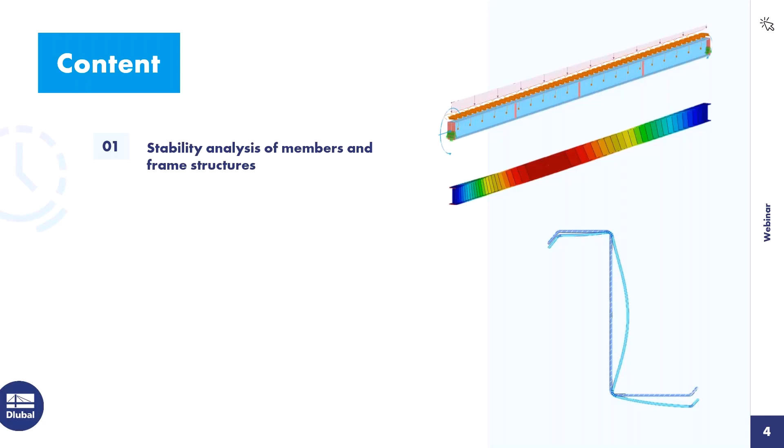And the table of contents looks like this. First I want to focus on the stability analysis of members and frame structures. Second, I want to go to the stability analysis on a cross-section level using the finite strip method. Then I want to show you how the buckling analysis is integrated in the steel joints add-on. Lastly, I want to show you how we can use the structural stability add-on for troubleshooting of instabilities, how we can leverage that for that purpose.

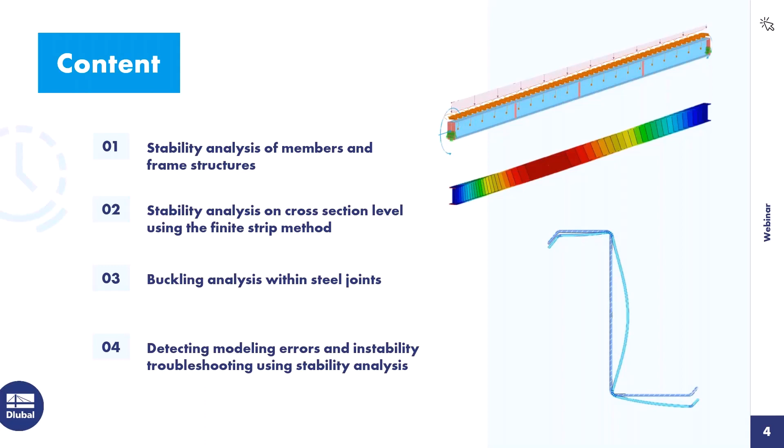Okay, before we jump into the first model, I want to give you a brief introduction and explain at the very least a few points related to stability analysis and how we perform it in RFEM 6. So what elements or structures are we taking care of with this analysis method? It's usually slender members and structures under compression that tend to become unstable, where the slenderness of a member or a structure is not only defined by its dimensions—the greater the length of a structure or member compared to the cross-sectional dimensions, of course, the more slender and prone to instabilities.

But it's also related to material properties. So if I have a material that has high strength and low stiffness, then it's more likely that stability failure will be the critical design element as opposed to cross-sectional failure. And then lastly, the boundary conditions, of course, play a major role. If I have rotational restraints or lateral restraints for our member, it's not that likely to become unstable.

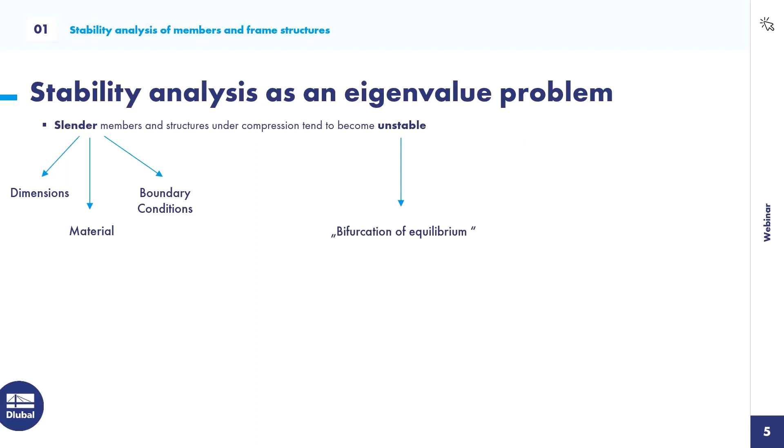And what do I mean with unstable? When we reach the unstable state, we have no clear state of equilibrium. We have instead a bifurcation of equilibrium, so there are multiple paths that the structure may follow. And that's why this linear stability analysis is often referred to as a linear bifurcation analysis, or LBA. I might use that abbreviation throughout this webinar as well. Also, the critical load may sometimes be named the bifurcation load.

Using the FEM, the ideal bifurcation load can be determined by solving a conventional eigenvalue problem. So we can set that up and solve that.

In that context, what does ideal mean? It means for the stability analysis that we treat the structure as linear. So we assume a fully linear structure behavior and a perfect geometry, meaning the base geometry of our model is used in this stability analysis.

The eigenvalue problem in the general formulation has two symmetric matrices, A and B, the eigenvalues lambda, and the respective eigenvectors x.

To solve for the unknown eigenvalues lambda, we have to set the first term of our formula to zero, and that's mostly done by calculating the determinant of this first part in the bracket and setting it to zero. We have multiple numerical tools or solvers to do that.

Determinant determination, yes. And in our specific case, in the stability analysis, our two symmetric matrices are represented by the linear stiffness matrix and the geometric stiffness matrix.

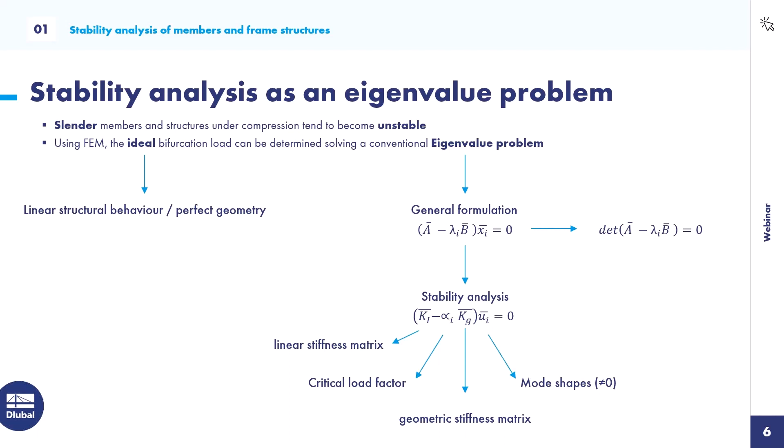We want to start with some fundamental solutions that are very well known amongst civil engineers. Euler already in the 18th century provided some simple analytic solutions for prismatic members under pure compression.

They are well known as the Euler cases. I have listed the 4 fundamental cases here with the analytical formulas to calculate the bifurcation load, or the critical load. In the first step, I want to go into our program now.

And try to simulate an Euler case 2 and make a small comparison, to see if we can evaluate the correct critical load according to Euler, and what else we can get from this structural stability analysis.

So let's jump into the program. As I said, I have prepared some smaller models for you. The first one is this simple Euler case. I have an HEB 300 beam with a length of 5 meters, and I applied a unit load of 1 kilonewton that sets the member under compression.

In order to perform a stability analysis with our add-on structural stability, I need to first activate it, and I can find it in the base data of the model. I activate the respective add-on here, which you can find under analysis add-ons, then click OK.

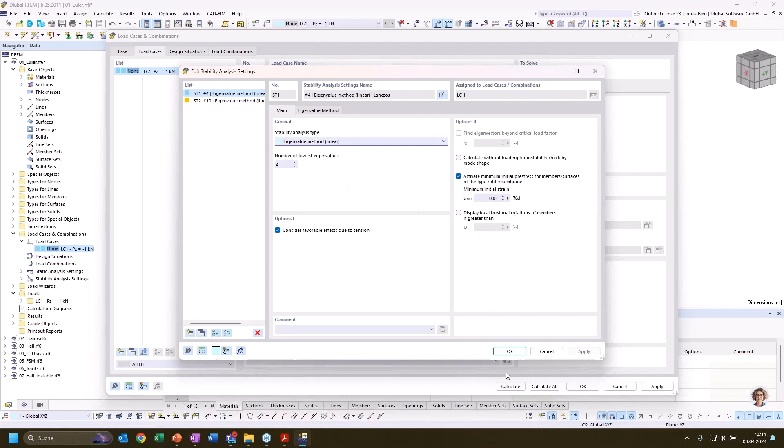multiple solver variants to solve the determinant of our eigenvalue problem. But the default solver should mostly suit us for this problem. There might be cases where you have subsystems that are not connected to each other. Then this default solver will throw an error and suggest another solver variant.

But with these default settings, I can just run the load case. Now the first thing the program is doing is solving the static analysis, and then he solves for the stability analysis. And when I have performed the stability analysis, I not only get the results for the static analysis, but I can also switch to the stability analysis results by this drop-down menu here.

Okay, so what do we see here? First of all, we get a drop-down menu here in the upper left corner, and also in the table we can see that we have these 4 mode shapes calculated with a respective critical load factor.

This represents the factor which I can multiply the external load with until my system would collapse due to instability. So if I would increase the unit load of 1 kilonewton up to 7,035 kilonewton and run a second order analysis, my system would become unstable and I would get an error message saying that. So I can read these critical load factors here.

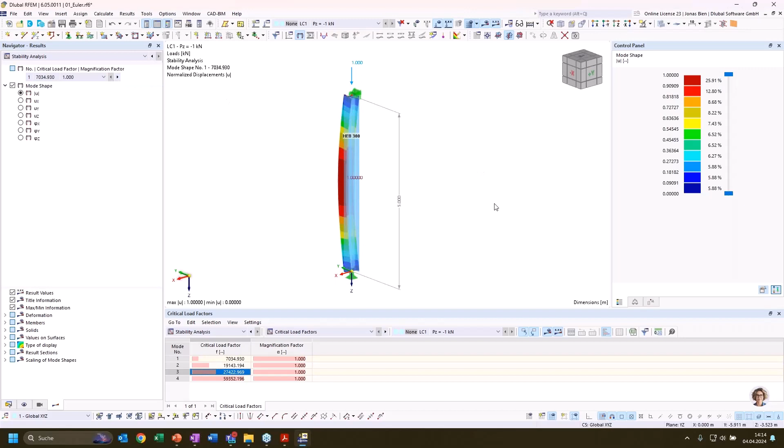Okay, so we can go through the 4 eigen modes here by clicking the table entries, or also go through the entries in the drop-down menu. We can see the first eigen mode presented to us would resemble buckling of our I-beam around its weak axis, and it's doing that in a symmetric way. We have a simply supported beam here, so that looks as expected.

Then the second mode shape would be buckling around the strong axis. And the third and fourth eigen modes are some multi-wave eigenmodes for buckling around the weak axis. These are mostly not very interesting for us, so usually only the mode shape with the lowest critical load factor is of interest for us.

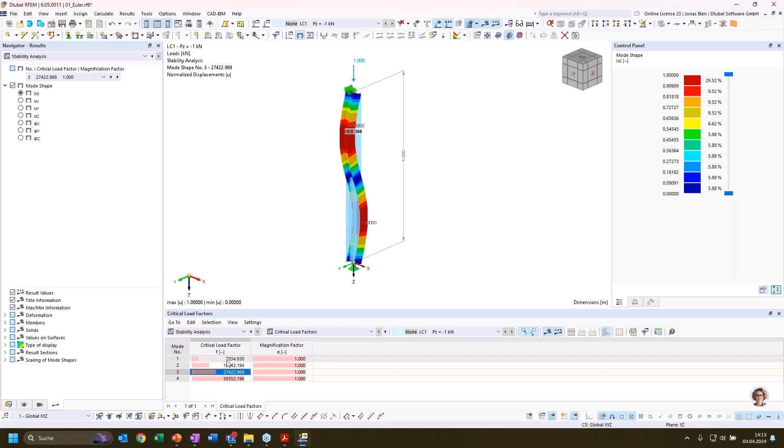And I want to now compare the critical load factor that we have calculated here with the critical ideal Euler load that we have for our Euler case 2.

Just so that you remember, we could calculate it using this formula: pi to the power of 2 times the Young's modulus times the moment of inertia of our section, divided by the effective buckling length. In this case, it would be the length of our member times 1, to the power of 2. I could do that using my calculator, but then I would need to look up all the values for my section, the member length, the material properties, and so on.

So I want to show you an alternative solution. We can also use the in-app console that we can open via the toolbar. In here, I can reference all the objects that I have in my model. For example, I could reference my material number 1 by typing this and then typing a dot, and then I see all the options or properties that I can ask this object for. For example, I would find the elastic modulus here, and if I press enter, I get as an output the elastic modulus of our material number 1 in SI units.

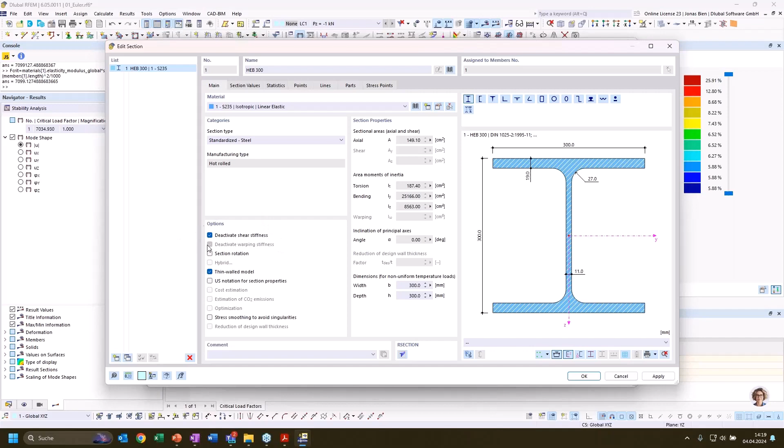So that's pretty close to our critical load factor that we calculated here according to our structural stability add-on. The difference now comes from an effect that we take into account with the finite element method in our calculation, which is the shear stiffness of the section that was neglected by Euler.

So if we want to compare values, we can manually deactivate the shear stiffness for our section in RFEM and do the calculation again, and see what our critical load factor would now be. If I again go to the results, we now see that our critical load factor is much closer to the ideal Euler load.

It compares very, very well.

We could also calculate the critical load for buckling around the strong axis. We just need to swap the Z with a Y value, and we have the moment of inertia about the strong axis. This value is quite satisfying when compared with the result we received from the structural stability add-on. So that compares quite well. We've, as we expected, met the results of the analytic formula.

Now that we're confident our solution provides reasonable values, I want to show you another important result of our stability analysis when it comes to member results. This is often used for the later design of the column. If, for example, we would take a classic approach to design this steel column using an equivalent member method, we would need the effective buckling length. We can use the structural stability add-on to calculate that effective buckling length.

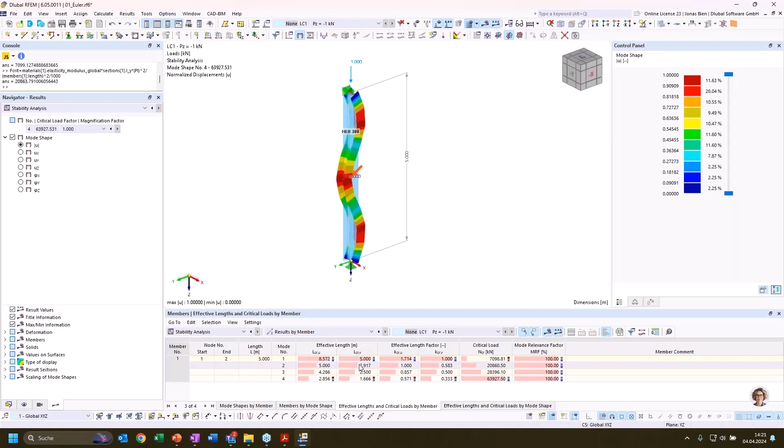So we just go to the Results by Member tab in the table, and go to Effective Length and Critical Loads by Member — the last tab also has these effective length values included. Now we see for each mode shape, we have effective length given for both main directions. U represents the strong axis, while V represents the weak axis. It's like Y comes before Z, and U comes before V — that's one way to keep it in mind.

For the first mode shape we have two effective lengths, one for each axis. I want to explain what's done in the background — it's nothing else than taking the critical load formula from Euler for case number 2 and recomposing it, evaluating it for L, with beta being the buckling length coefficient, and beta times the system length being L critical, the critical buckling length. When we know our F critical, the critical buckling load, we can evaluate the critical buckling length. And dividing by the system length, we can evaluate the buckling length coefficient beta. That's what's done here in the background.

The critical load of the member is just the normal force, the actual force in the member, times the critical load factor. From this F critical, our effective length is calculated, and then the effective length factor is calculated. We can do that as well using our console, plugging in this reassembled formula.

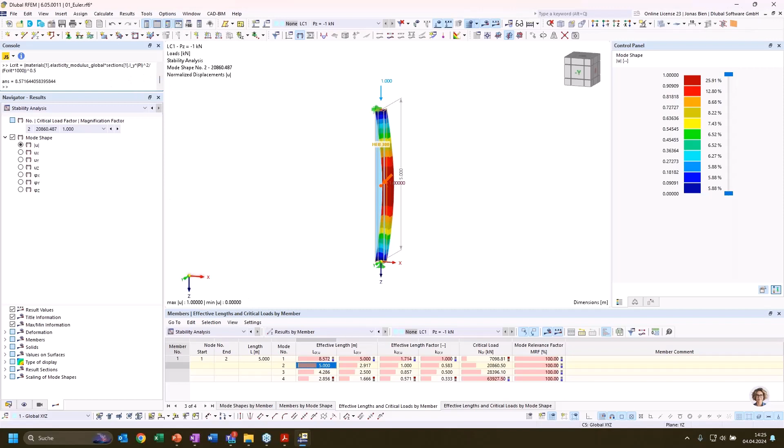I can demonstrate that by again evaluating the L-crit formula, but instead of taking the Z moment of inertia for the weak axis, I put in the moment of inertia for the strong axis, and I receive a value of 8.57 meters — but it wouldn't correspond to the relevant buckling length of our system for buckling around the strong axis. So this is very important to keep in mind when using these effective lengths for the stability design.

One thing I want to show: we can directly import these buckling lengths into our design add-on. So if I want to design this column with our steel design add-on using the equivalent member method, I have to assign these effective lengths.

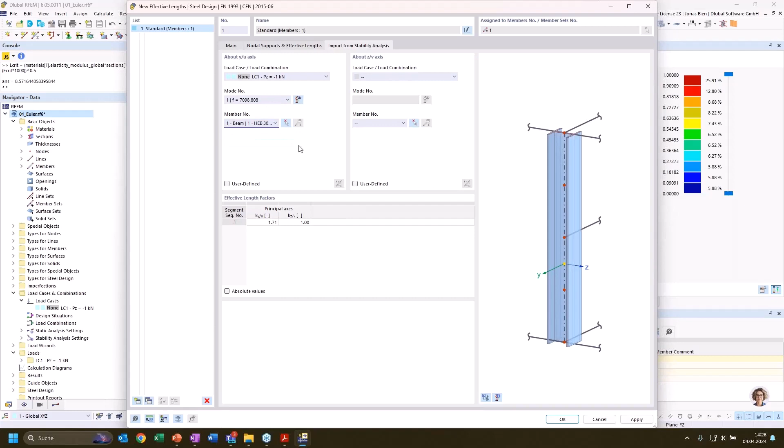Here I have the option to import the buckling length from the stability analysis. If I click this, I get another tab where I can enter the load case, the mode shape, and the member number. It will then take the buckling length coefficient from mode number 1 for beam number 1 and evaluate the effective buckling factor to use in the design.

In this case, we have to take care that buckling around the strong axis happens in mode number 2, so we would need to enter mode shape number 2 here, while mode shape number 1 would be for the buckling length coefficient around the weak axis. So that would fit and suit our expectations.

Of course, we can do that for more complex systems as well. We need to keep in mind that when we have a more complex system and change something, the order of the mode shapes can also change. They are always sorted by the lowest eigenvalue or lowest critical load factor, so mode number 1 always has the lowest critical load factor. If we change something in the system, this sorting can change, but these entries need to be checked again manually because they don't automatically adapt to the changed model.

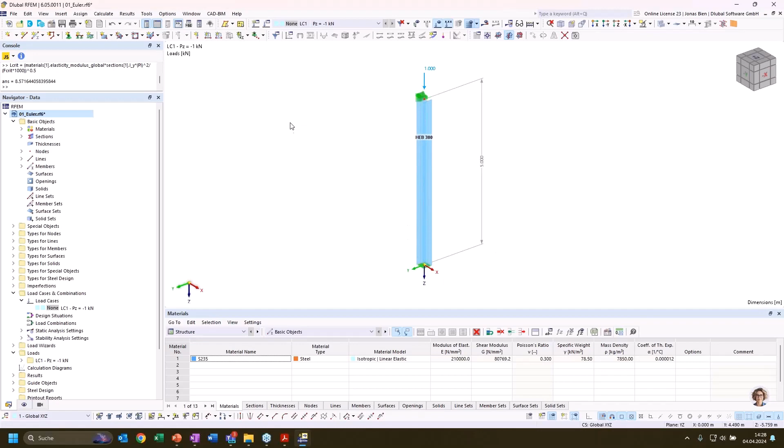I want to show you instead how the buckling length coefficients change or adapt when I adjust the statical system. For example, if I take a rigid boundary condition at the bottom of this column, it should calculate a lower buckling length coefficient because now the system resembles Euler case number 3. We'd expect a buckling length coefficient of 0.7, and that's exactly what we get for the first mode shape for the weak axis and the second mode shape for the strong axis.

We also need to consider, for these known cases, why should I use my add-on here? Because these cases are known, I can just apply the Euler formula and calculate my buckling length directly.

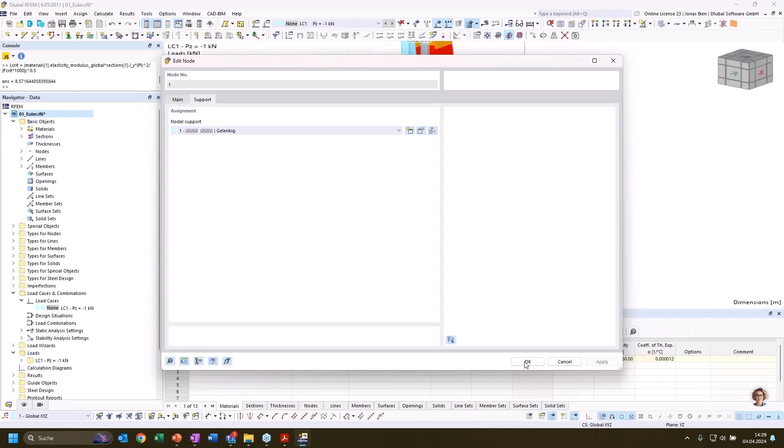But what if we have a certain spring stiffness here, somewhere between Euler case number 2 and Euler case number 3? Here it's not so obvious what the buckling length for our equivalent member check would be. Of course, we could look into textbooks that cover these cases, but we can also use the structural stability analysis to evaluate the effective buckling length factor, and as expected, it comes out between 1 and 0.7.

So everything's set. Because it's a linear analysis, it's interesting to see what the program does with nonlinearities, so for example, if I apply some kind of nonlinear boundary condition here.

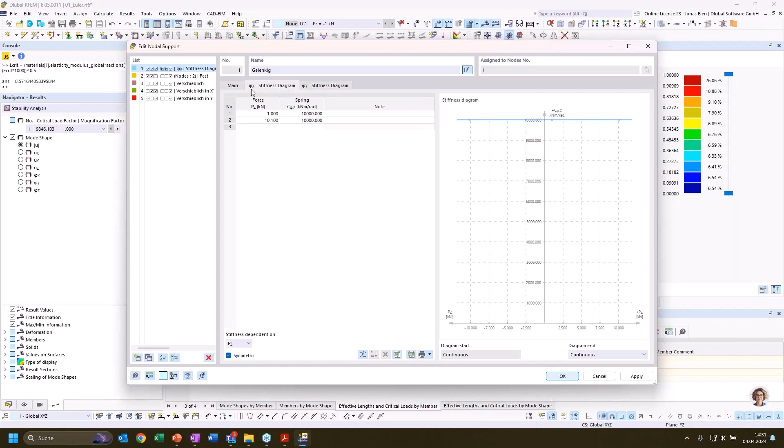At first glance it doesn't look that nonlinear, because in this case I want to apply a stiffness diagram where the stiffness of our spring at the column bottom relates to the vertical load. As you can see, it should be constant, no matter what the vertical load in the column is, the spring constant should always stay constant. So it doesn't look nonlinear at first glance, but we have to take into consideration that all these nonlinearities are ignored in the structural stability analysis.

I want to demonstrate this. So although we have set this nonlinear spring stiffness at the bottom, as a result we get Euler case 2, where a pure hinge is assumed at the bottom. So only these entries are taken into consideration for the structural stability analysis when it comes to supports.

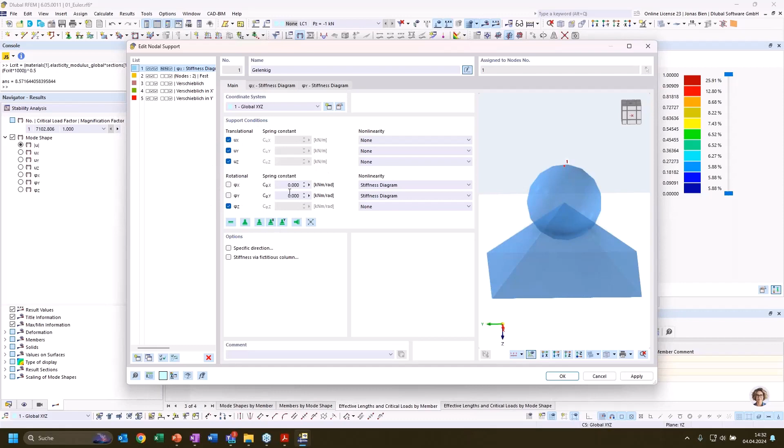Of course, when working with other nonlinear elements such as tension rods or buckling members, these are taken into consideration or not according to their state in the static analysis. So if we have a tension member that is under tension, it will be taken into consideration in the structural stability analysis as well, and vice versa.

Okay, one last thing to finish this simple example: let's delete this nonlinearity and see what happens if we divide this member in half.

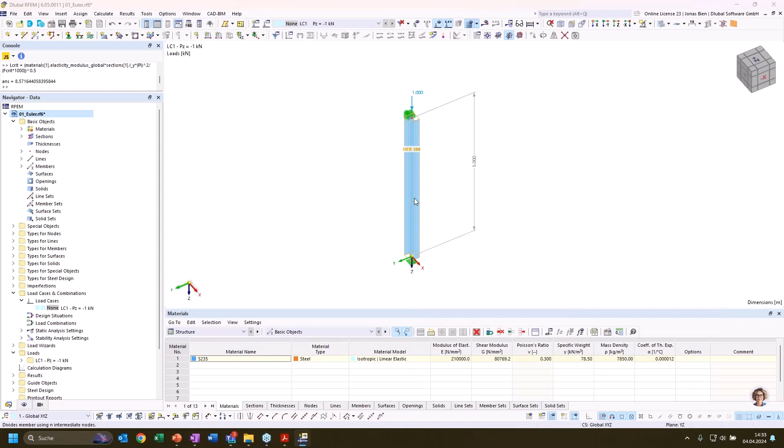I just introduce an intermediate node and divide this one column into two separate members, and again run the structural stability analysis. What does it do with the buckling length? Is it still valid, or does it give me some weird results? Let's see. The critical load factor is still the same as if we wouldn't have divided this column.

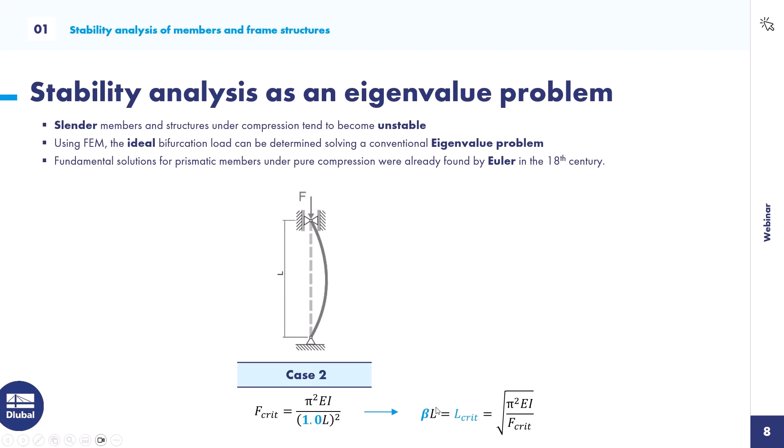So we could still use this effective length factor for the stability design within steel design, or some design add-on. It would still be valid.

Okay, now let's increase the complexity a bit. What if we have more than one member in our model? In this case, we have a 2D model of a two-hinged frame with an additional column, number 5, that is just connected to this two-hinged frame by a truss member. This is basically a simply supported column, as we have seen before, which leans toward this two-hinged frame, or is supported by the two-hinged frame at the column head. All three columns, member number 1, 3, and 5, are loaded with a load of 1000 kilonewton in compression.

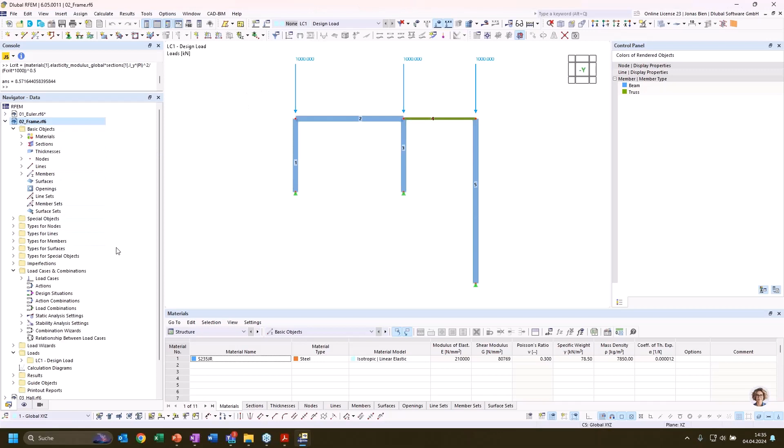Now let's perform a stability analysis for this load case as well. It should be all set for this analysis, same settings as we used before for the Euler case. And accordingly, we also get 4 mode shapes for our structure. I want to quickly browse through these mode shapes together with you.

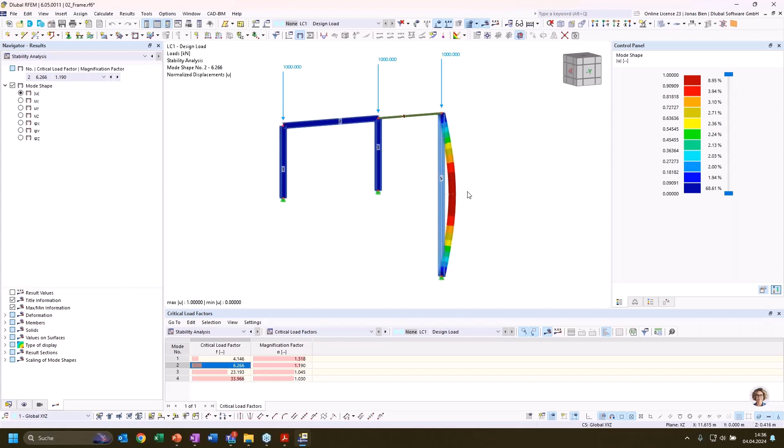So the first one is some asymmetric lateral deformation of the two-hinged frame, and also this connected pinned column is moving with the two-hinged frame. Then the second mode shape would represent buckling of the longer column with pin supports around the strong axis. The rest of the structure does not seem to have any deformation. The third would also be a higher mode of this pinned member number 5. And mode shape number 4 would resemble a symmetric buckling mode of the two-hinged frame without any participation of the simply supported column here at the side.

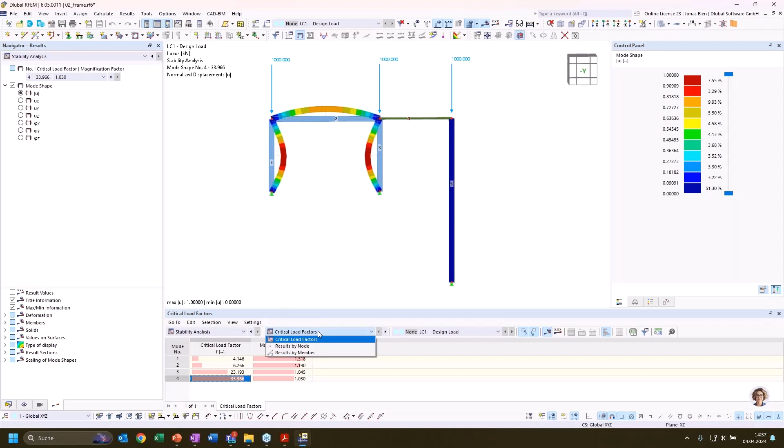So if we want to now extract the effective length, for example, for the columns of the two-hinged frame, we can go to the member results of the stability analysis and check the effective length by member. I can then click on one of those members and I will automatically be routed to the respective table entries. Now in the first mode shape, as we have seen, this two-hinged frame suffers from buckling around the strong axis, and we could read the effective length factor accordingly for the strong axis in this column. So we would get an effective buckling factor of 2.8, which is also in the realm of the expected results for such two-hinged frames.

If we now neglect this simply supported column at the side, we would expect an effective buckling factor higher than 2, and the exact value would be influenced by the stiffness of the girder and the columns, and of course the length and so on. Now with the additional column, it's also influenced by that. So that would be quite clear. We could take this effective length factor for designing this column for buckling around the strong axis.

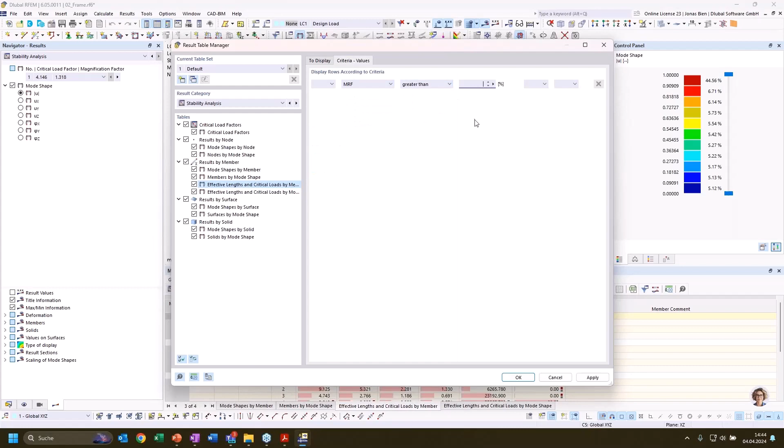For example, for the determination of effective length factors, here I would go the other way around. When I'm interested in the relevant buckling factor for column number 1, I would go through the modes I have calculated and only consider the mode shapes that have a significant mode relevance factor, and read my buckling length factor from the mode that has the lowest critical load factor. In that case, I would definitely take the value of 2.8 for column number 1 and also for column number 3.

All right, but I want to show you in the next step how we could also leverage this tool in a more realistic setting, or how to approach the buckling length determination in a more realistic model. So here we have an industrial hall. We have a lot of different load cases here that would give us probably about 100 or 200 load combinations. Of course, in some applications, we can have a lot more load combinations. Then the question is which load combination, or the first question for our buckling length determination, is which load combination is most severe for buckling for a specific member.

And I have now, for this case, deliberately started with result combinations, because sometimes, for example when I want to design bridges or so, I may have 10,000 load combinations, and it's not possible to calculate all 10,000 and assess them for stability. So what I would recommend, if you have too many result combinations to handle in one model—of course here it would still be feasible and no problem—but if you have additional load cases, that can be a problem.

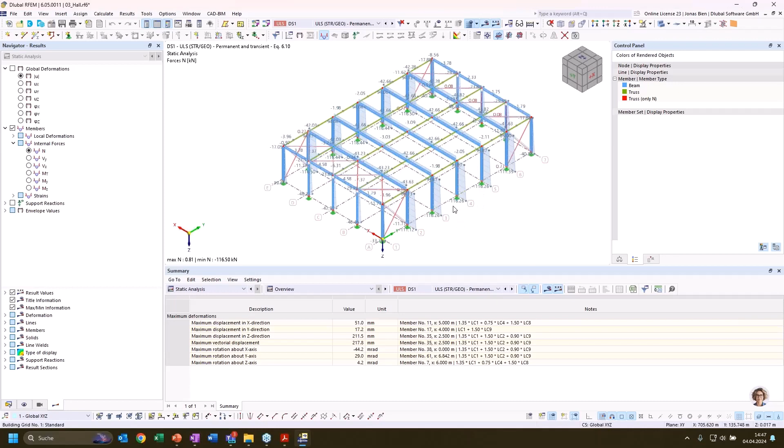I can find those if I go to the static analysis results for this design situation, go to results by members, internal forces, and stick to this middle column here. I click the column and get, in this result combination, all extreme internal forces for this member. So for example, the combination with the lowest or highest axial load, including the sign. The same is printed for the highest shear force in Y direction, highest shear force in Z direction, lowest shear force, and so on.

But we are interested in buckling, so I'm interested in the combination that gives the highest compressive load, which would be this one here with minus 116 kilonewton. In the last column, I would have the loading or load combination that leads to this axial load. Now from the result combination, just by right-clicking this combination, I can generate a load combination from this table.

Now for this load combination, where I have the feeling this could be the most relevant for buckling of our columns, I can perform an eigenvalue analysis, a linear stability analysis, by just activating it here and calculating it. So now I very specifically run the stability analysis for just this one load combination that I have generated from the envelope.

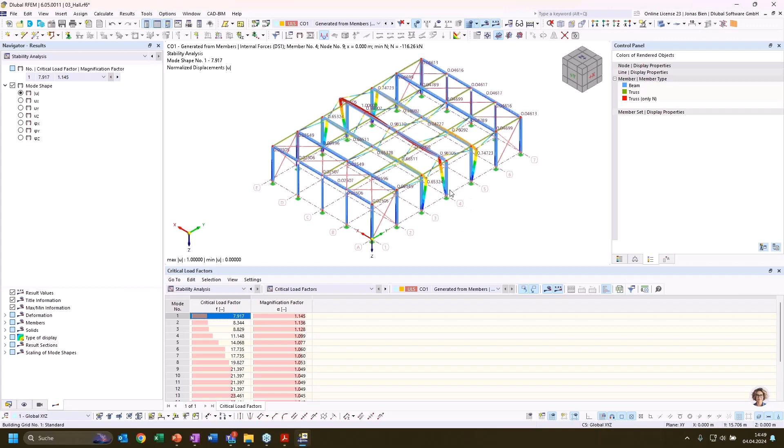Now the second question, after sorting out which design situation could be relevant, I have to figure out, for this column, which mode shape is most relevant for determining my buckling length. So again, as before, I have 20 critical load factors and mode shapes, and I can browse through them. Some involve deformation or buckling of the frame where this column is involved. Some are only isolated buckling of those columns, or some compressive member in the roof, so these wouldn't really interest me.

In order to filter these out, I can again use the mode relevance factor. I go to the table effective length and critical length by members, click on my member number 4, and get the whole table. I get the mode relevance factor for all 20 mode shapes calculated, and I see that only in 2 of these mode shapes is my column member really participating. So these would be the only 2 mode shapes suitable for extracting the buckling length.

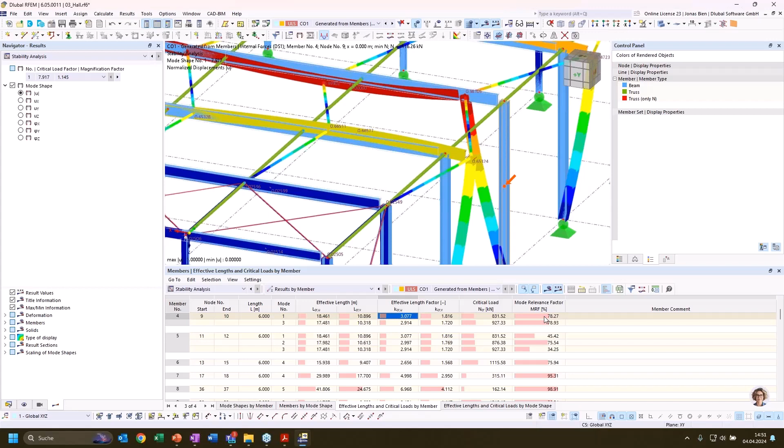I could of course apply the filter to make it more accessible. Then I would again follow the rule from the last smaller example: take the mode that has the lowest critical load with a significant mode relevance factor, and take the effective length factor for, in this case, buckling around the strong axis from this mode shape. So this is how the mode relevance factor can help you assess the relevant mode shapes for a particular member design.

That's what I wanted to show you on this model. Now I want to take the next step and highlight something you may have noticed so far. We have only discussed flexural buckling of members, but especially in steel structures, other stability modes can also govern the stability design of these members, namely torsional buckling or lateral torsional buckling. We can also investigate those stability modes with our structural stability add-on, but we need to activate warping torsion to detect those stability modes.

I want to make another small example where we investigate the lateral torsional buckling of a simple system, where again, as in the first Euler case, we know the exact solution, and I want to first compare the values we get from RFEM with the analytical value. So in order to perform a structural stability analysis that also considers lateral torsional buckling, we would, in addition to the structural stability add-on, also require the torsional warping add-on.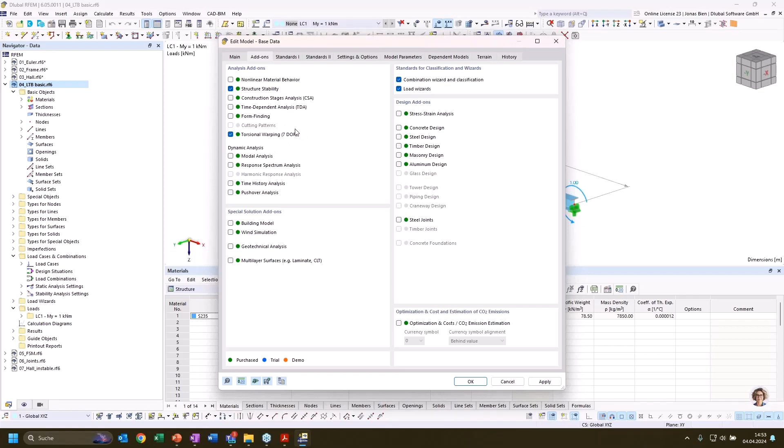And as soon as we activate the 7th degree of freedom, this would be directly included in the stability analysis, or would be taken into account.

I have now for this simply supported member, it's an HEB 300 again, with a length of 10 meters and a constant bending moment. I could run the stability analysis, and now we are not only getting modes for flexural buckling, or we wouldn't get any flexural buckling modes for this member at all because we have no compression in it, but I didn't activate the structural stability analysis for this particular load case, so I will just do that.

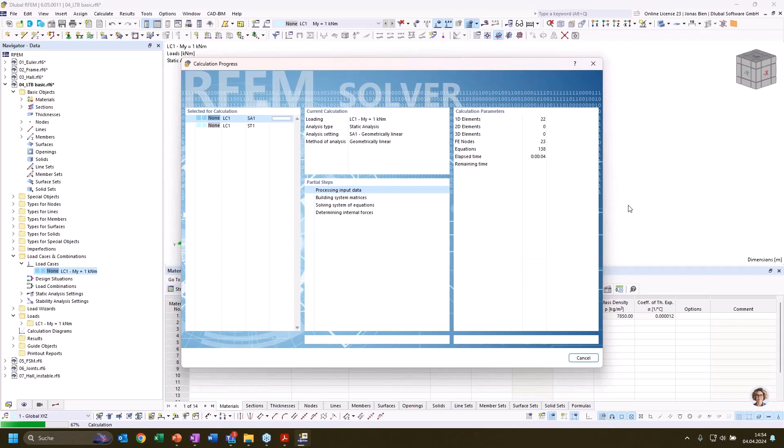And now we should get a lateral torsional buckling mode. When we switch to the results of the stability analysis, we can now see very clearly this characteristic deformation of our member. It tilts and at the same time moves in the direction of the weak axis. And again, we get a critical load factor.

And this one we can compare with the analytical solution. For this simple system, an analytical solution can be easily found in the textbooks. It was once also implemented or written down in some of the codes. For example, in the old German steel construction norm or code DIN 18800. I think in some national annexes of Eurocode 3, it's also given this formula.

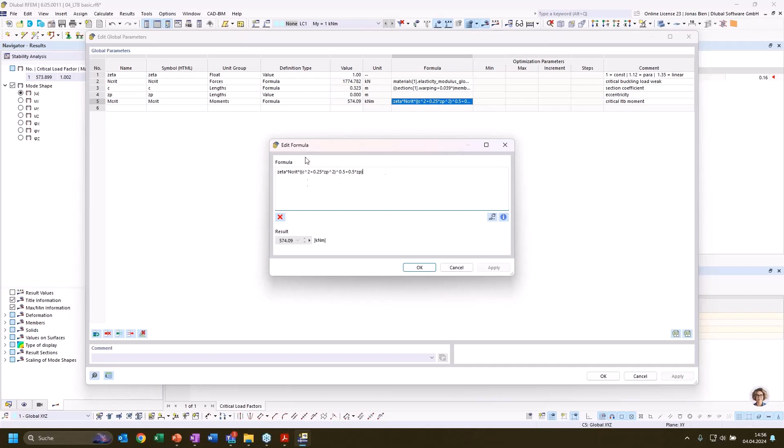But for our convenience, I already plugged this formula to calculate the critical bending moment for lateral torsional buckling into our global parameters. So that's another thing I can do instead of just using the console and typing in my commands to evaluate certain parameters or values. I can also use global formulas to global parameters to calculate something. For example, I have now created a formula for the evaluation of mcrit, and we can look at what goes into it. Maybe this looks somehow familiar to you.

So here we have a value or a parameter that describes the moment distribution, which is zeta. It's 1 in this case for this simple case with uniform bending. Then we have the elastic buckling load, Ncrit, that's the one that we already assessed in the first example. Then we have some parameter C that takes into account the warping and torsional stiffness of our section. And we have the ZP, which resembles the eccentricity of the loading, which is in this case not important. And what we get from this formula is a critical bending moment of 574 kilonewton meter.

We could also use the console again to evaluate this. So all the global parameters that we have stored, we can call them here in our console. And in this case, it's again written in SI units, so I would need to divide it by 1000 to get to kilonewton meter. And this is very close to the value that we evaluated here with the structural stability add-on. So it works again quite well.

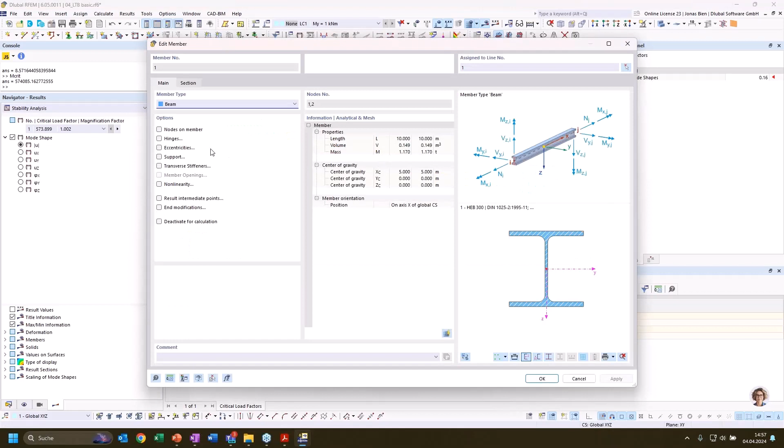But of course, as in the Euler case, we can use our structural stability add-on to investigate much more complex cases. For example, we could add member support. So I go to the member and add a support, and then I get this tab here where I can enter a member support. I could manually put in some rotational restraint. I could even apply an eccentricity of this member restraint. For example, I could say I have a rotational restraint at the top of the flange.

And we can now also in the global analysis take into consideration shear panels and rotational restraints. So these are also entered as fictitious stiffness. And you may know them from steel design or aluminium design or timber design, where you had always access to those restraints, but they were only considered in the design of the member, so in the design add-on. But we can now use them in the global structural stability analysis as well.

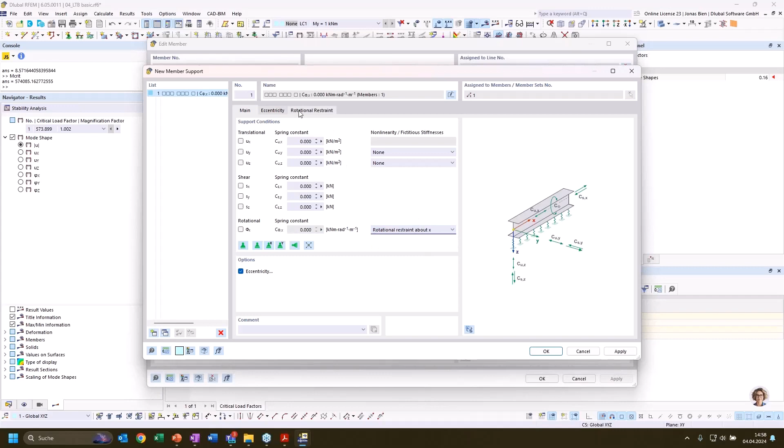So I could, for example, define a rotational restraint. For example, I want to consider some kind of sheeting that I have on top of my girder. I will now just take some random settings, more or less. I take some sheeting just to get some stiffness. Of course, these values, they were accessible all the time, but now we can, as I said, also leverage or use the stiffness that we define here in this global structural analysis.

And one thing that is also new, and I want to highlight to you, is that for the spring stiffness of the connection between the trapezoidal sheeting and our member, and also for the load introduced to the sheeting, we can now set load dependent values.

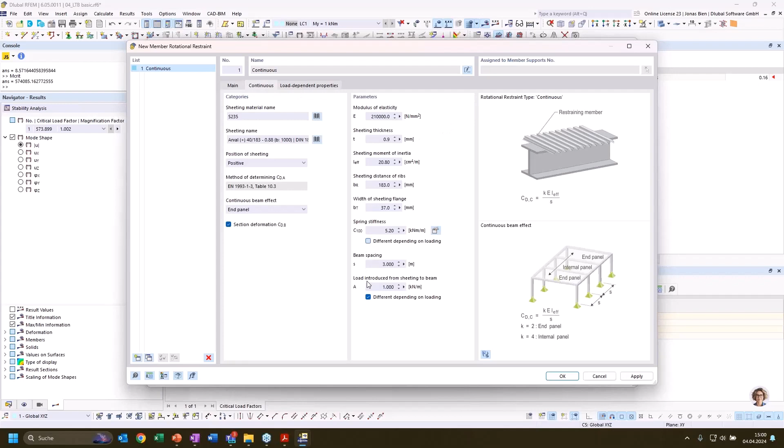If we click these options, we could set different values for different load combinations, for example to distinguish between situations where we have suction on the roof and compression or pressure on the trapezoidal sheeting. We could take this into account by adding different values here in the table. This is also quite new since a few months.

With this rotational restraint, I could also add a shear panel. And by the way, we are now able to not only add a shear panel in Y direction, but also in Z direction, which could be interesting for columns that are also girders rotated by 90 degrees for some reason. So we can also use that now, since some weeks.

We have now calculated directly some stiffness for the rotational restraint from our trapezoidal sheeting, and we could consider this in the stability analysis. By default, these fictitious stiffnesses, so the trapezoidal sheeting in this case, would only be accounted for in the design add-on.

If we activate the steel design add-on, in this case because we have a steel girder, and I now activate the lateral torsional buckling check according to the equivalent member method, we already see here that the default way of calculating the critical moment value is using the eigenvalue method, the same method we also use in the structural stability add-on.

Of course we need to set some boundary conditions for the design add-on. But in our case it's quite simple - we have simple support with fork supports, and that's what the default settings are also for the effective length settings. So that should be all right.

In order to perform the steel design, we also need a design situation and some load combination inside this design situation. I will just add a load combination with 1 times the first load case. And if we now do the calculation, we are running a static analysis, then the structural stability analysis of this member, and then the steel design analysis.

Let's check the results and compare them. First, in the stability analysis, it seems like nothing has changed - we still have a critical bending moment of 574 kilonewton meter. But in the design add-on, let's check the result here.

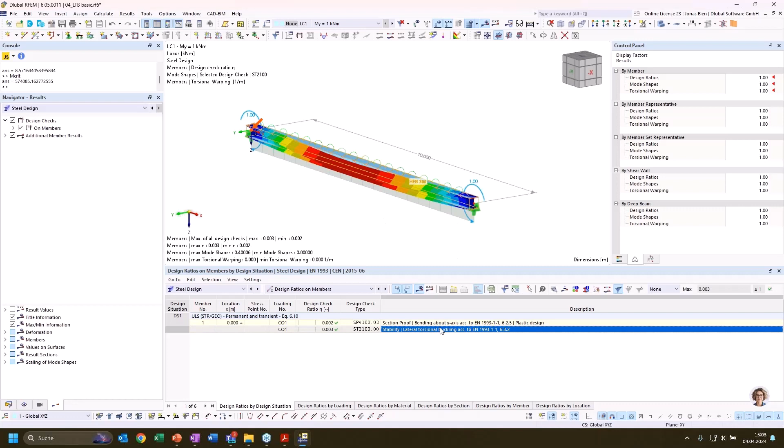We have now the check for lateral torsional buckling here. We can also see what the relevant mode shape would look like if we click on design details. And if we double click on the design details, we can also check what mcrit value is evaluated in the internal eigenvalue analysis.

We see that now in the steel design add-on, the rotational restraint on top seems to be already taken into consideration, because we have a much higher critical moment in our steel design add-on, while in the structural stability analysis the values stayed more or less the same.

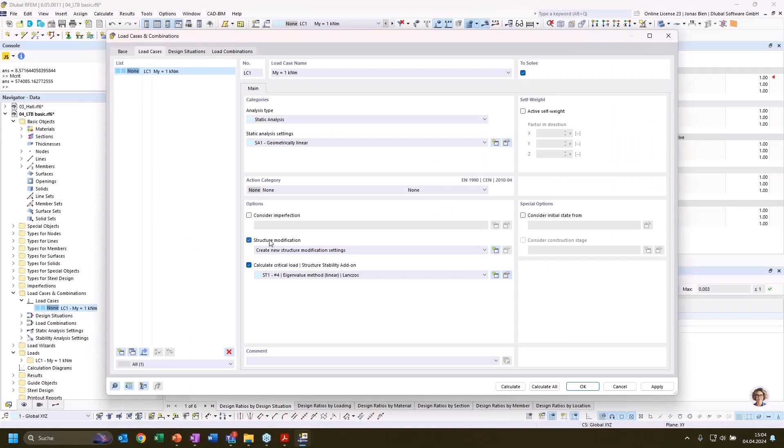But we now have the option to take these fictitious stiffnesses into account also in the structural stability and static analysis. And we can do that by adding a structure modification to this load case. Here we just need to activate the option to consider shear panels and rotational restraints also in static, stability, and modal analysis.

Before, it was only possible to take these shear panels and rotational restraints into account in the design, so in the LTB design within the design add-ons. But now we also moved this possibility to the global analysis.

Because you may want to perform a lateral torsional check, like using a second order theory analysis with imperfections, and maybe you want to also have these rotational restraints be effective in this global analysis. So that's why we added this option through the structural modification.

What is also new is that you find these objects, so the member shear panels and the rotational restraints, now under types for members and not anymore under the types for the design add-on. Like in earlier releases, we had those two objects under, for example, the types for steel design, aluminium design, or timber design. Now you find them under general objects for types of members.

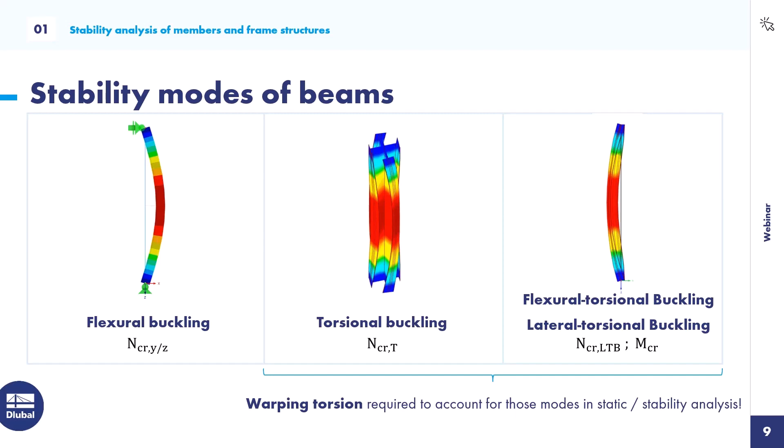And of course, if we are interested in local buckling of the cross section, we could extract from these beam models a shell model - that's quite easy in our software. You can just right click on a beam member and say I want to generate a surface model from this member, and then surfaces are directly generated with the correct thicknesses, just as they had the thickness for the member.

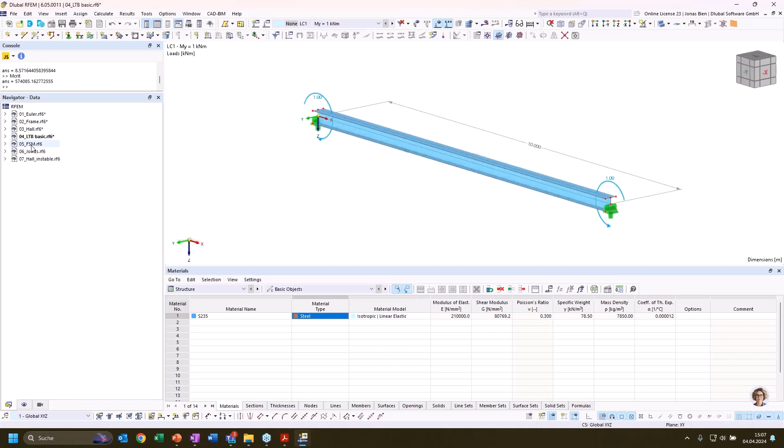For example, the top flange would already have a thickness of 19 millimeters corresponding to the HEB section. And now we could mesh this in a very fine sense to do a stability analysis for this shell model, which lets us also analyze local buckling modes of the section. Because it's not very interesting to do it with a hot rolled section, which in this case is not susceptible to those local failure modes, I want to do it with a cold formed thin walled section.

So here I have prepared a fifth model where I have a parametric C section with a height of 200 millimeters, width of 75, and a wall thickness of 2 millimeters. That would be a perfect example for a thin-walled, cold-formed section. And as I just showed you, I have transferred my beam model into a shell model.

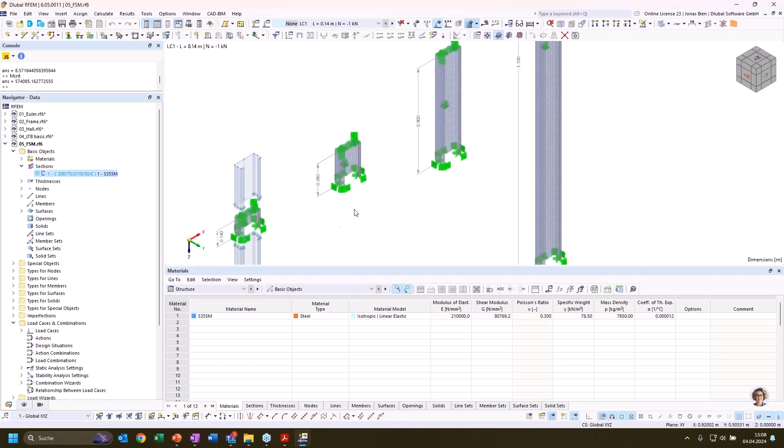I have meshed it very finely in order to get all the relevant local buckling modes. And then I have modeled 4 different members with different lengths. So I have a very short element of this C section, then one which has doubled the length, one with a length of 90 centimeters, and a very long C member as a shell model.

And I have applied some boundary conditions that avoid any unwanted singularities in the model. Then I have applied, in 4 different load cases, unity load to the top and bottom of these column stubs. So as a first step, that should resemble the Euler case - a beam with a certain length where I apply uniform pressure on it. But in this case, of course, I have a monosymmetric cross section, which is very thin.

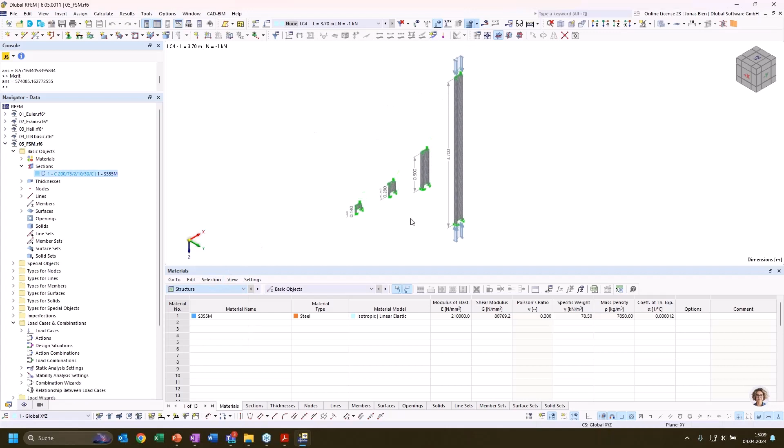So let's check out the results - what do I get from such a stability analysis? In this case, I have performed a stability analysis of the shell model. If we look at the results for the longest segment, this 3.7 meter long C section, I have the first critical load factor at 84 kilonewton, and I can see that the mode shape resembles flexural torsional buckling. In this case, I don't see any local buckling of the different cross-sectional elements, but the whole section is deforming at midspan.

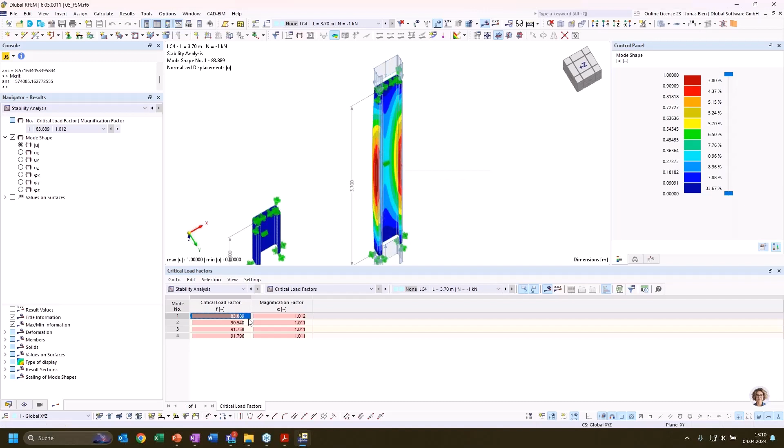If I check the second mode shape, I have buckling about the weak axis. The third mode shape now would be one that involves also local buckling of the web, and this we can only see with such a refined shell model.

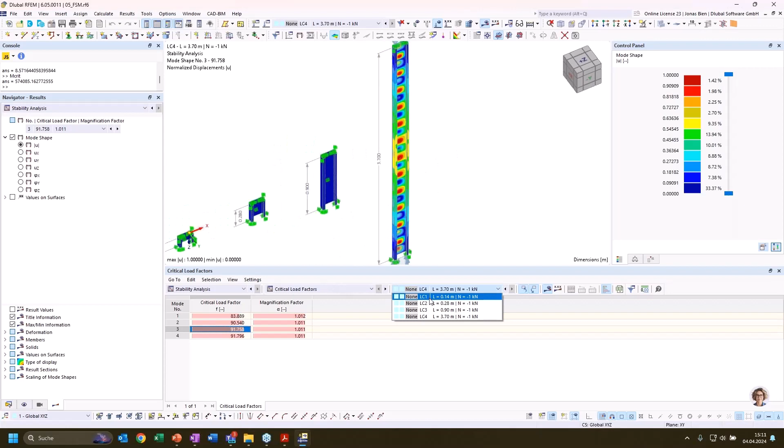Now what happens if we take a shorter column? We see that the critical load factor or critical mode shape is now governed by local buckling. So in this case, global buckling like flexural torsional buckling or flexural buckling wouldn't be the major issue, but stability failure would be more related to local buckling of the web.

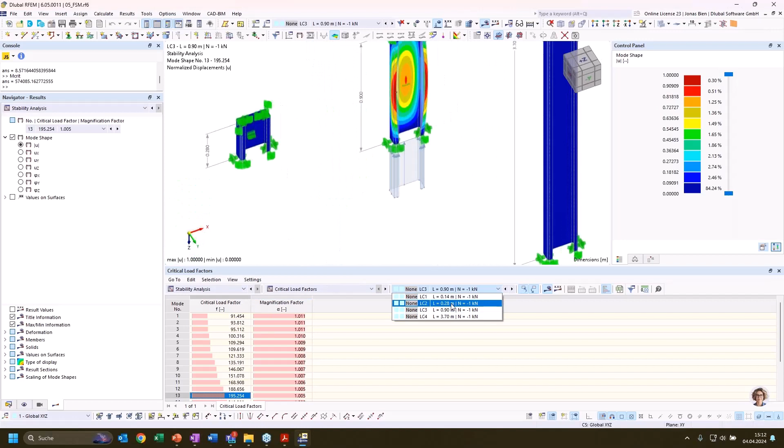And I can go through this and find several mode shapes where especially my web buckles in different configurations. Then in mode shape number 13, I find also a mode shape which is particularly interesting for cold formed members, and that is distortional buckling. In this case, not separate elements of the cross-section deform, but the whole cross-section bends, so to say - if we look at the midsection, the lips are deforming horizontally, and at the same time the web is also deforming. And then finally, for the very short configurations, I again find the local buckling modes.

And what is also important to note is that the critical load factor is not changing significantly - the most relevant critical load factor doesn't change a lot when we compare the three smaller column segments here. We are always around a factor of 90.

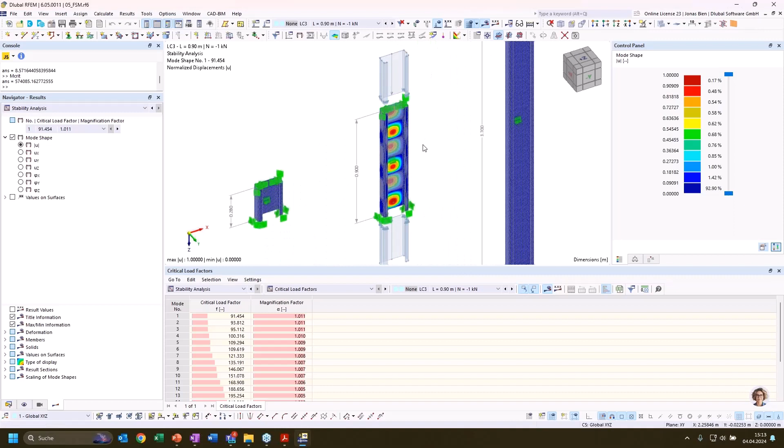But of course, this type of analysis comes with a drawback - it's quite cumbersome to prepare this kind of model. We see that we require quite a fine mesh to get valuable results, and calculation in this case would take 1 or 2 minutes for these 4 cases, because these are quite a lot of elements and degrees of freedom that we need to solve.

But we also have another alternative option to investigate such failure or local instability modes on the cross-section level, and this is kind of hidden in the edit sections dialog. That's why I want to show you that and highlight that we have this feature.

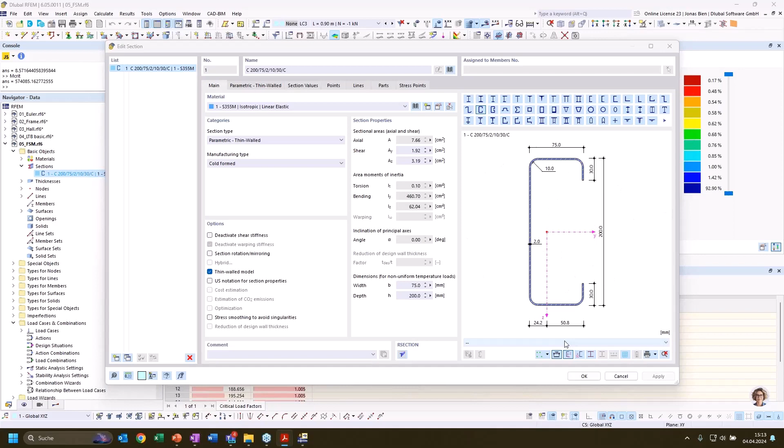For a particular section, we have on the right side a preview of the section with all the dimensions and so on. Below that, we have a drop-down menu where we can find a lot of interesting features and functions of this cross-section, for example unit stresses under certain loads.

But right at the bottom, we also have the possibility to investigate the buckling shape of this section for some unit loads, for example for a 1 kilonewton compressive load or for a 1 kilonewton meter bending moment around the strong axis, and so on.

If we click on that option, I get a diagram as a result, and what I get here is the so-called signature curve for our cross-section. It gives the relationship between the critical bifurcation factor for this unit load, 1 kilonewton compression, in relation to the member length.

So we can see that at the start, we have a very low member or small member length. In this case, for example, the first minimum is evaluated for a member length of 14 centimeters, which would be the smallest column stub that we have just investigated with our shell model.

And when we look at the respective bifurcation factor, we see that it's around 90, which does very well correspond to the linear bifurcation load that we have received from the stability analysis on the global level in the shell model.

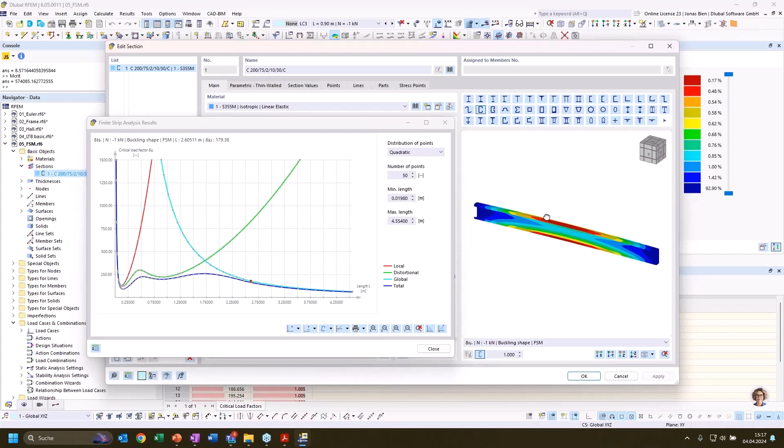One newly added feature is that we can not only display the results of the cross-section, but we can also directly investigate the deformation of our member with a respective length in 3D. This is of course also refreshed if I click one of those points on our signature curve - I get the respective deformation of a member of that particular length.

And what happens in the background? As soon as I start this feature here, in the background, the finite strip method is employed, and I want to show you what that means.

As we have now already discussed, we can do stability analysis of beams, which has the advantage that we have very few degrees of freedom. Or we could also investigate stability of members with our shell model, but here we have a lot of degrees of freedom, and solution takes quite a while.

And the finite strip method is some kind of intermediate accuracy solution where we divide the cross-section into multiple strips, and only one strip or element is used over the length of this member.

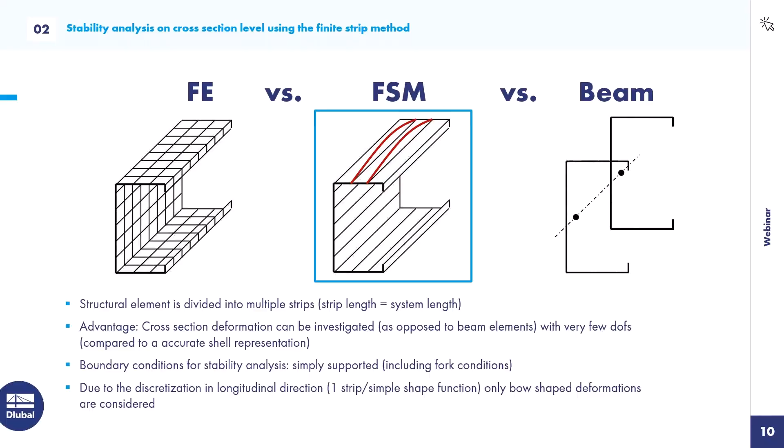One drawback, again compared with the shell element, is that we can only investigate, at the moment, specific boundary conditions. So the results are only valid for a simply supported beam that is assumed in the background.

We can only assess results for unit loads at the moment, and we cannot account for any local load introduction. Also, we assume that the behavior over the length of the member and the loading conditions are constant. And because we only use one strip over the length of this element to represent this member, we can only investigate failure modes that are bow-shaped, or eigenmodes that have only one half-wave deformation.

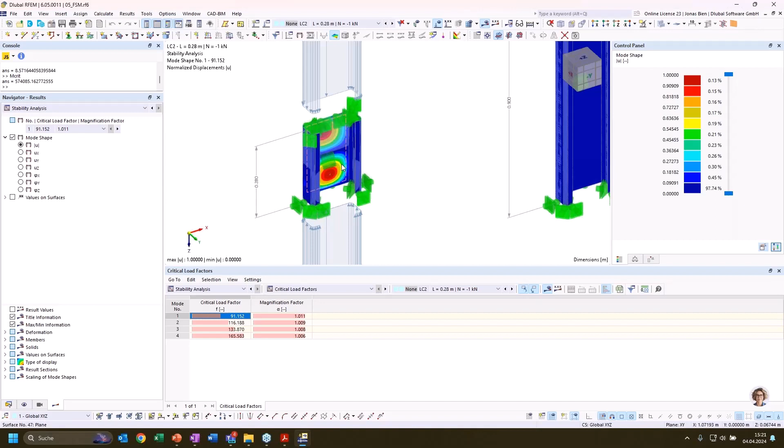But as we have seen in our shell model, there can be, for our second model here with a length of 28 centimeters, also local buckling as a decisive failure mode, where we have two buckles over the length of the section. This cannot be represented or investigated with the finite strip method as implemented in our program.

That's why we should keep in mind that we not only have one curve for this local buckling with the bow-shaped deformation, but also a similar curve that has its limit or minimum at a multiple of the first critical member length. Here, the first critical member length was 14 centimeters, but at 28 centimeters, we have a similar bifurcation load, just with multi-wave local buckling in the web.

We have multiple of these curves, so we should take the minimum bifurcation load for local buckling or also for distortional buckling as a straight line in this dialog.

If we compare this with the signature curve, we get a feeling for at what member length global buckling gets relevant again before we have local stability failure.

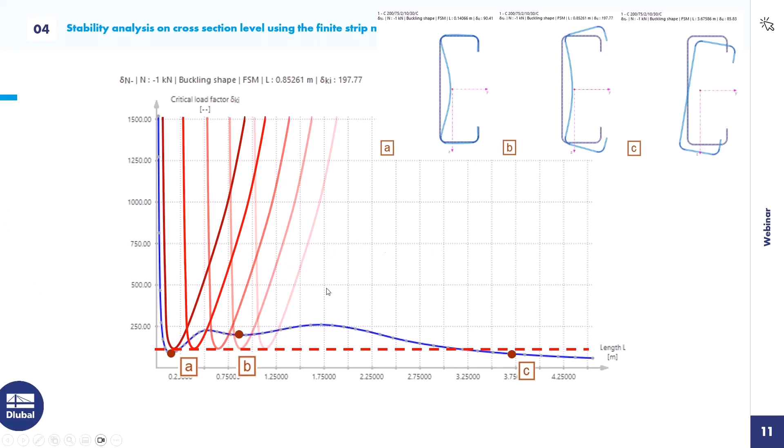This is not only a nice tool to get a feeling for which stability phenomenon can be an issue for my cross section. Depending on the member length I'm modeling, it could be that I can directly see local buckling is not a big deal, and distortional buckling is not interesting for me -- I'm in a realm where global buckling will govern the design. Or I could say, I'm at a length where local buckling and global buckling could happen at the same time, and I need to take into account some kind of interaction between these stability modes.

It also has a practical use. For cold-formed design within our steel design add-on, we use the distortional buckling curve evaluated on the basis of this finite strip method to evaluate the effective sections of our cold-formed section. We directly use this minima, the second minima of this distortional buckling curve, in the design of cold-formed members according to Eurocode 3 Part 1.3, and also for cold-formed design according to the American standard, the direct strength method. So it has a practical use and is already implemented in the cold-formed steel design.

All right, that's it for the second topic, the cross-sectional design. The two last topics will hopefully not take that much time to explain. I just want to mention as a side note

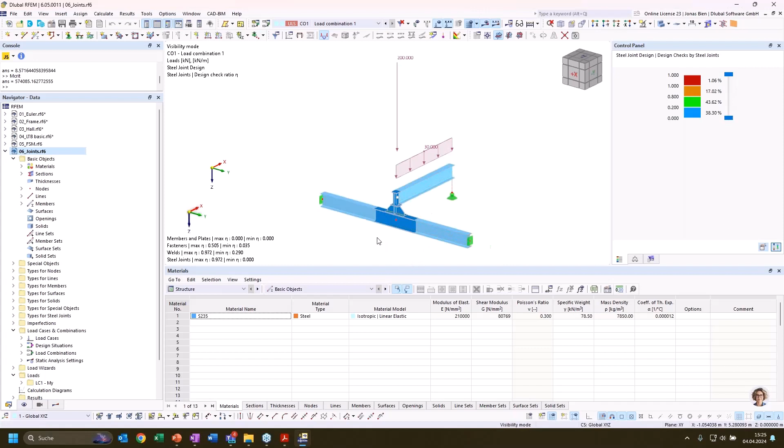that we can also perform the linear eigenvalue analysis within our steel joints design. To demonstrate this, I have here a relatively easy model where I have a connection between a secondary member and a main member. The secondary member is loaded, and I can not only do the usual steel joints design checks, but also perform a buckling analysis. I first want to show you where I can activate it.

You can find that in the ultimate configuration for the steel joint, in the first point, perform buckling analysis. If you have activated it, then not only is the resistance of the components calculated, but also a linear eigenvalue analysis is performed, and we can assess the results via

the table. Here we also see that we don't only have the result values for the stress strain analysis, but also for the buckling analysis. Now in this table we get the critical load factor for our 4 mode shapes that were calculated by default, and we can also assess the mode shape by clicking on one of those table entries and opening the steel joints deformation or results button.

Now I would see the mode shape for mode shape number 1 in this particular joint. I can browse through the different mode shapes by clicking the different table entries, and I can see that for this particular joint in the first mode shape, I would have some kind of web buckling under the load introduction here from the secondary beam.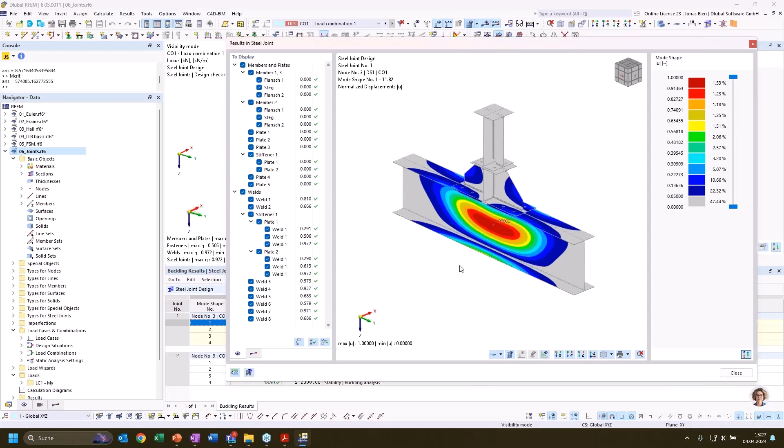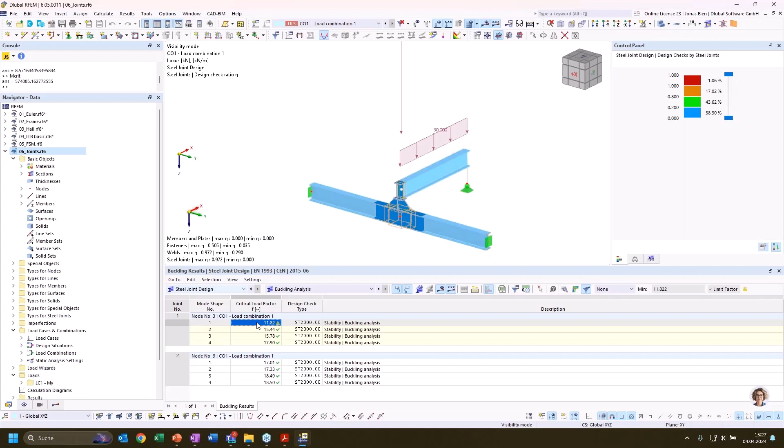I could take some measurements to avoid that, but I also need to take into account the critical load factor in order to judge how critical this mode shape is. For a critical load factor of 11.8, we get this warning sign, which means the calculated critical load factor is lower than the default limit value of 15. But that doesn't necessarily mean we have a problem here.

The default bifurcation factor limit is derived from Eurocode 3 part 1.1, which is more for member design, and this limit of 15 should be conservative for most cases. What I'd suggest is to really study the mode shapes observed as a result of this buckling analysis, and see if we can extract limits for this critical load factor from the respective parts of the design codes.

In this case, we have some kind of web buckling under the concentrated load introduction here. So I would check chapter 6 of Eurocode 3 part 1.5, where web buckling under patch loading is treated, and see if I can derive limit values here.

If I know the correct limit value and want to improve the behavior, I can directly do that by modifying my joint. I have a second configuration of this connection where I just added a stiffener in the main beam, and we see the critical load factor has already increased from 11.8 to 17 just by adding these stiffeners to the main member web.

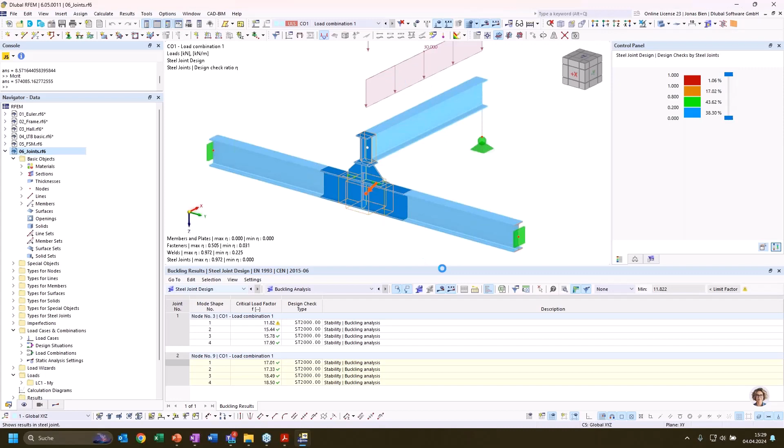If I study the first mode shape, I see that my buckling panel is now divided by this stiffener. So every change directly affects the results of this buckling analysis.

Okay, let's move to the last point. I promised to also show you how we can use the structure stability add-on to troubleshoot when we have some instabilities within our model.

I prepared another industrial hall, very similar to the third model, but here I reduced the number of load cases a bit, worked with load combinations, and introduced some mistakes which lead to an unstable solution.

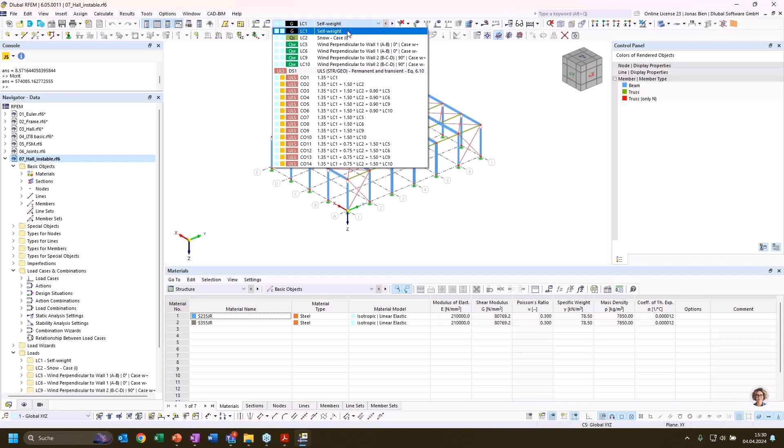So for example, I would have modeled all my structure, put in all my load cases, and now I'd like to press calculate and grab a coffee, letting the computer do the rest of the job.

But when trying to calculate the first load case, just the self-weight under first order theory, I get a warning message, and the program highlights that the stiffness matrix is singular. It also gives a hint where I could look for possible mistakes, but I can't really see anything wrong here.

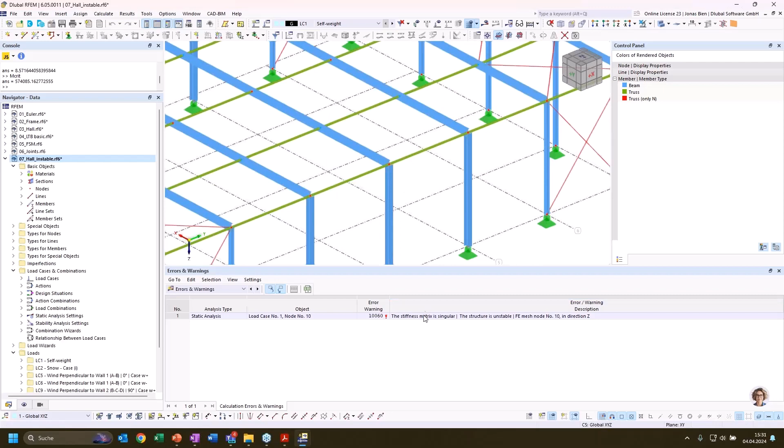I could now activate my structure stability add-on and conduct an eigenvalue analysis with a specific setting. In this case, when I want to check for instabilities, I can say it should calculate eigenvalues without loading for instability checks, so it looks for eigenvalues of 0 value and calculates the respective eigenvectors.

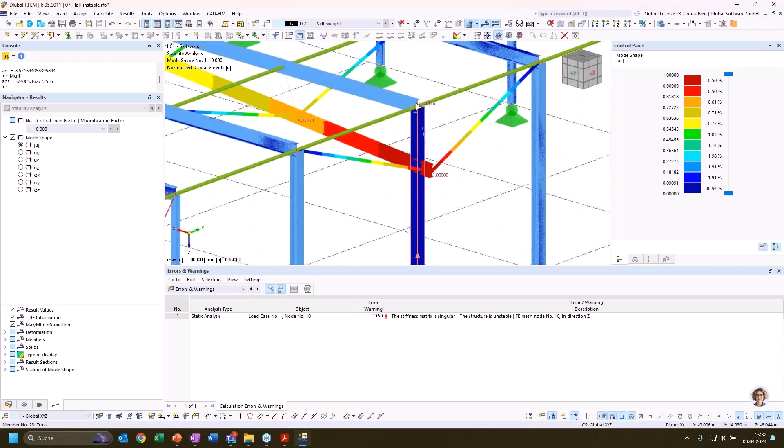What I see now is that the girder in axis number 4 is more or less falling down, as if it's not connected to the column. When I zoom in, I see there are 2 separate nodes, and the column is not properly connected to the girder, which could be the reason for my instability.

I quickly resolve this issue and now try again to calculate load case number 1. Let's see if it works now. Again I get an error message, and again I can try to get additional information with my structure stability analysis.

Clicking through the deformation results, I see that for the rotations around the global x-axis, something looks off. I get very high deformation values, and it seems like the girder in the last frame freely rotates, which indicates it's not properly connected to the columns, or some degree of freedom is not restrained properly.

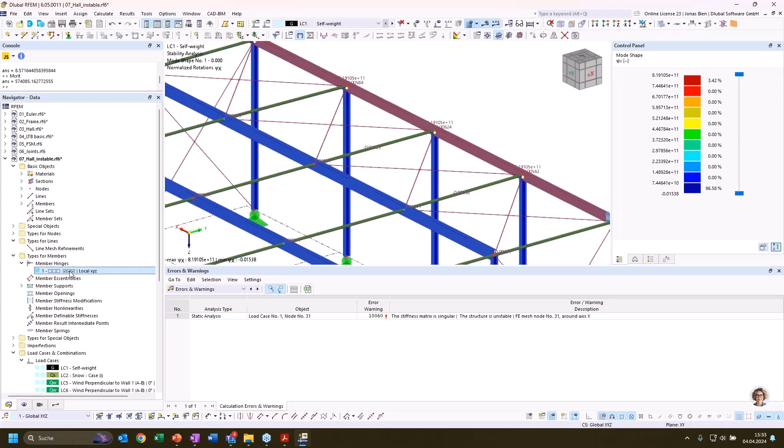Looking into the connection definition, I see I have a hinge on every column end, and I defined this hinge with rotations free in all 3 axes, which means this member can freely rotate at the top. Maybe that was a mistake - I wanted to establish frame action here, but accidentally applied the hinges to all my columns.

Now that I found this mistake, I can remove those hinges in the frame corners, and check a third time if the solution runs or if the simulation works.

And if I haven't done anything wrong, it should work now. Okay, now I get results for this first load case in my static analysis, which means that my model seems to be stable now. And now I want to go to the full extent and calculate all my load cases and load combinations.

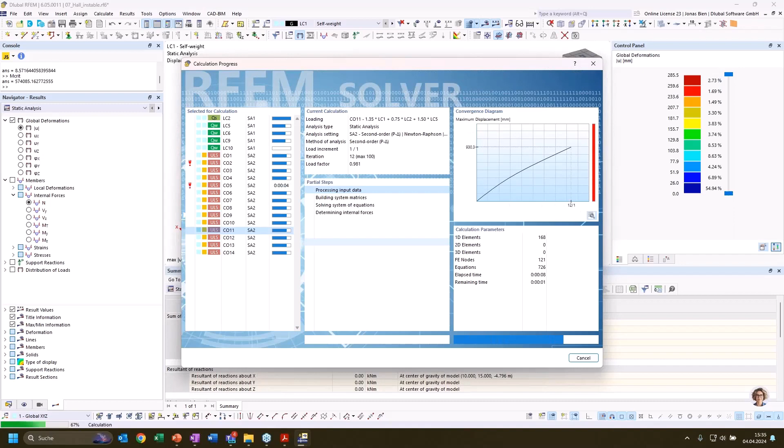That would be the second stage, and it is again not clear that I have no problems with my model, because my load combinations now I calculate with second order theory. And I again get only for some load combinations errors that my stiffness matrix is singular and my structure is unstable.

So this message can have two reasons. Either I have done something wrong in my modeling and I've disconnected parts, or some DOFs are free and not restrained in my model. Or it could mean that my system is really overloaded because I have now calculated according to second order theory. It could also be that I've reached the critical bifurcation load of my system.

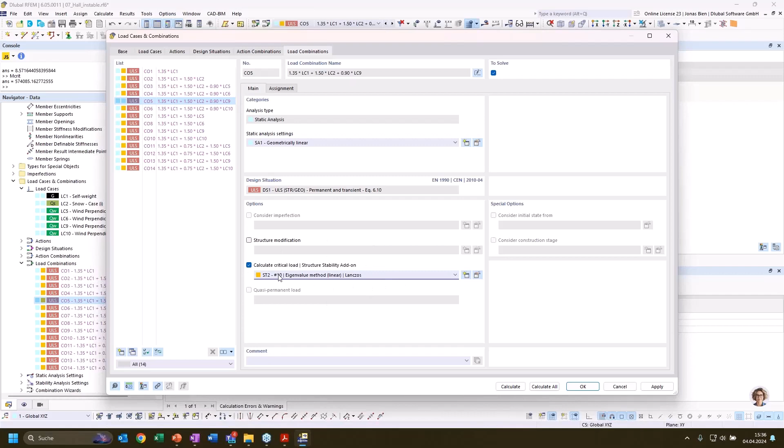And in order to check this, I would recommend to go to the load combination that is problematic. For example, in this case, load combination 5 or 2. And I can just switch to first order theory and perform a linear stability analysis, just a regular one. Now I use the second setting where I calculate 10 eigenshapes. Could have taken less because I'm only interested in the first mode shape.

Let's go to the results for my load combination 5. And what I can see now is that my critical load factor is below 1. And that indicates that my structure is indeed unstable because it is overloaded. And I can also check what could be the issue based on the mode shape.

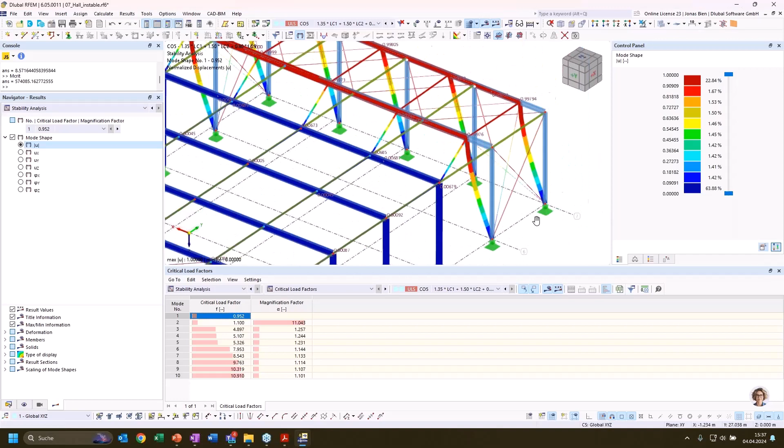And if I now look closely, I see that in my second frame, I set the wrong columns. I set the columns from the end frames, which are much too weak for these internal frames. But this can also be quickly resolved by just copying and overwriting the member dimensions with the columns from frame number 3 or 5.

And if we now again perform the same simulation on our load combination 5, we will hopefully be able to get a suitable solution and a stable model. And now we can see, okay, with our first mode shape or critical load factor, we are above 1 and our model is good to go, and we have good chances that we can properly design the members within our structure.